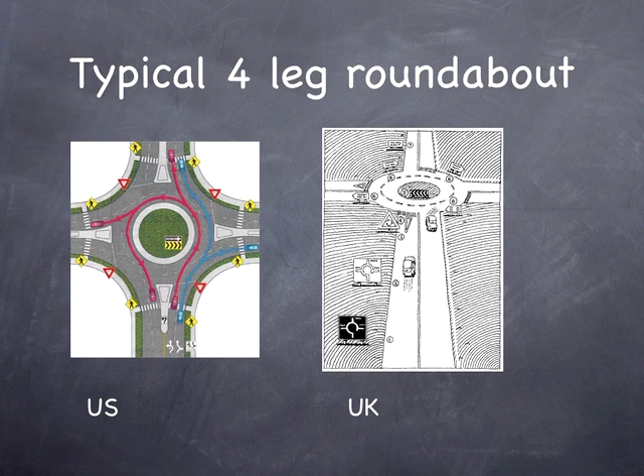to keep in mind. Geometric elements: the pedestrian crossing, and obviously it's an accessible pedestrian crossing, everything is compliant with the Americans with Disabilities Act, you have ramps, and the ramps are appropriate grades, and so on. There is a median island here called a splitter island, which gives pedestrians a refuge so that they only have to look one way when they're crossing, and then they can get to a refuge island, and then they can look the other way and cross the other side.

You could put pedestrian actuated signals. I've seen that done in places. That's got downsides, because one of the advantages of roundabouts is you don't have to put signals in, and if you start putting signals in, then you make it a little bit more complicated. Depends on what your pedestrian flows are.

A yield line: car here has to look this way to see whether they can yield to enter, but they're only looking in one direction at a time because they only have one conflict that they have to cross. And then this is a single lane roundabout. There is the central island. Okay, you might put bicycle lanes in on the side.

In this particular example, they call them bicycle treatments, and it's sort of odd because then the bicycles have to converge into traffic, so I'm not exactly sure what the advantage of that design is. And then this is the circulatory roadway. Okay, the apron is a concrete strip on the inside edge of this. Why would we put an apron there? A concrete apron on the inside of this.

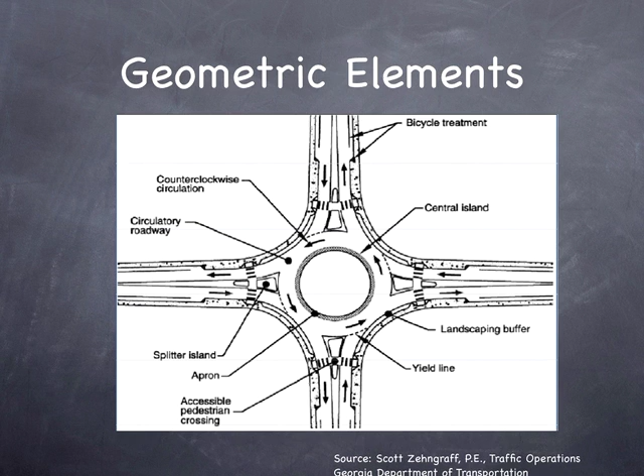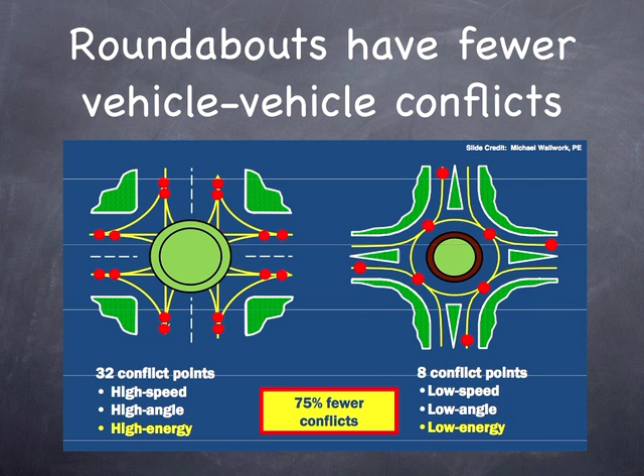The advantage, the safety advantage: drivers are paying more attention. That's one thing to keep in mind. But there's a lot fewer conflict points, in addition to the conflict points being at a low angle. And so you definitely have fewer conflicts, and they're lower speed, lower angle, and thus lower energy, and therefore less damaging. And so this is a major advantage to roundabouts over four-way stops or yields or signalized intersections.

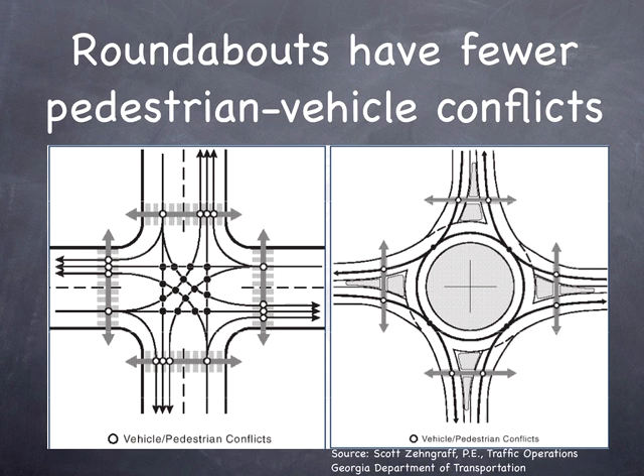There's also fewer pedestrian conflict points. Pedestrian has fewer things to think about. And so it should be safer for pedestrians, although it's a little bit less convenient. Now, we don't use them a lot in the United States. There's some historical reasons.

If you've ever been to Washington, D.C., you know there's a lot of traffic circles in Washington, D.C. Those traffic circles are not modern roundabouts. Those were designed back in the 1700s before the automobile. Reportedly, the story goes, L'Enfant, the architect planner of Washington, D.C., put in rotaries, these traffic circles, these big circles, both because of a design sensibility. This was popular in the era.

But if you have eight roads coming together at a single point and an island in the middle, you can put a cannon in the middle and point it in any of 8 directions and shoot at the oncoming mob. Okay, so this was the period of the French Revolution, and people were concerned about hordes of people and overthrowing governments and things like that.

So the intention was certainly not traffic control, and if you look at how they are today, the circles are typically far bigger than modern roundabouts would be. They're often traffic signal controlled, have a lot of other issues with them. Rotaries were implemented in a number of places.

The difference between rotaries and modern roundabouts, the primary difference, is who has to yield. So it used to be that the traffic in the circle yielded to the merging traffic. And now the traffic outside the circle yields to the traffic inside the circle. Why is that better?

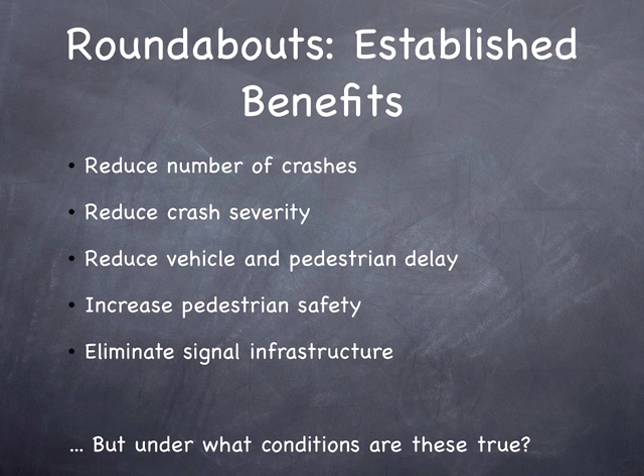And he did this in 2008 or so. They were looking at redesigning the intersection a few years ago, so he did this before the county did their study. Because the Central Corridor is coming in, and the hypothesis would be that if Washington Avenue were closed to traffic, which it has been, more traffic would use East River Road. Certainly some more traffic has. And that would cause this intersection, which was performing poorly, to perform more poorly. And so the question was, can you put a roundabout here?

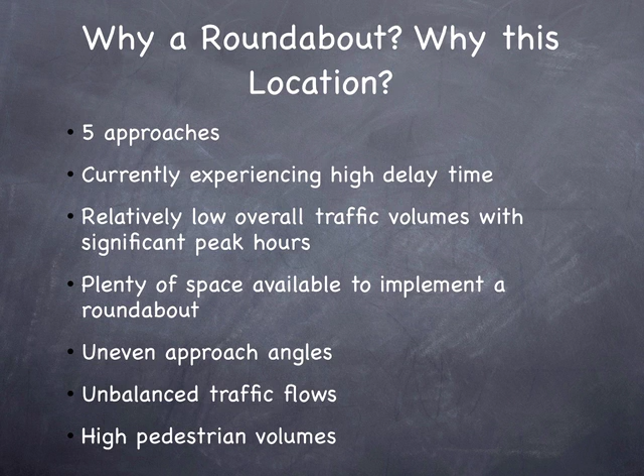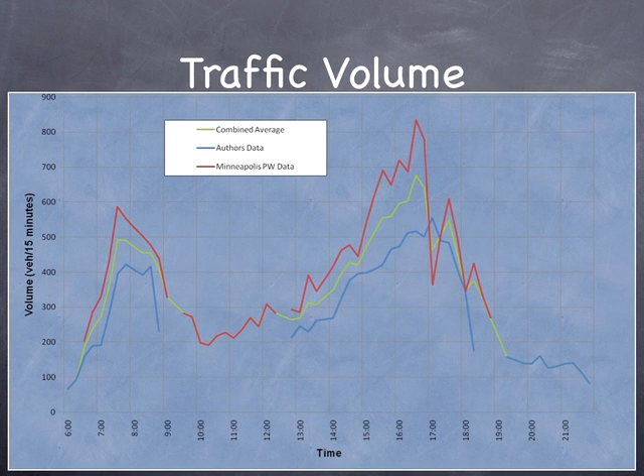Okay, so all the traffic that enters the intersection has to leave, but it doesn't all stay on Franklin. More of it that's on Franklin coming across eastbound over the bridge is going to turn onto East River Road to go to campus, for instance. So there's a heavy flow from campus to Franklin Avenue East. So it's a right turn movement in the afternoon, a left turn movement in the morning. But it's peaked higher on that movement all day long. So that's just sort of an oddity of this. Whereas River Parkway northbound peaks in the morning and River Parkway southbound peaks in the evening.

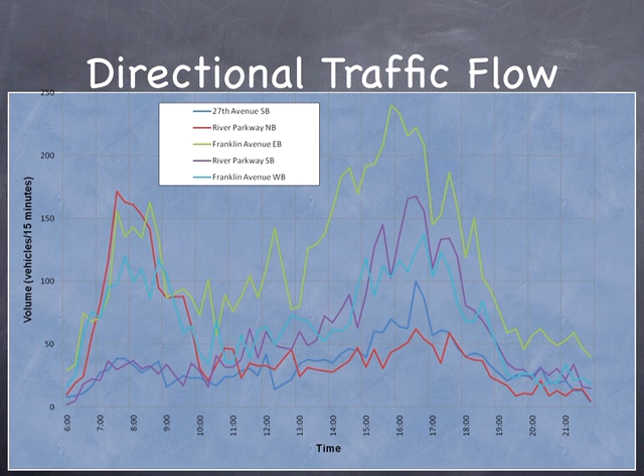3 lanes approaching on Franklin Avenue Bridge, 2 lanes going northbound on River Road, 3 lanes southbound on River Road at the intersection at the time, 2 lanes on Franklin Avenue, 3 lanes on 27th Avenue southbound. Okay. And so the intersection flares out in order to give more vehicles the opportunity to use the green time, because vehicles that are sharing lanes can't do that.

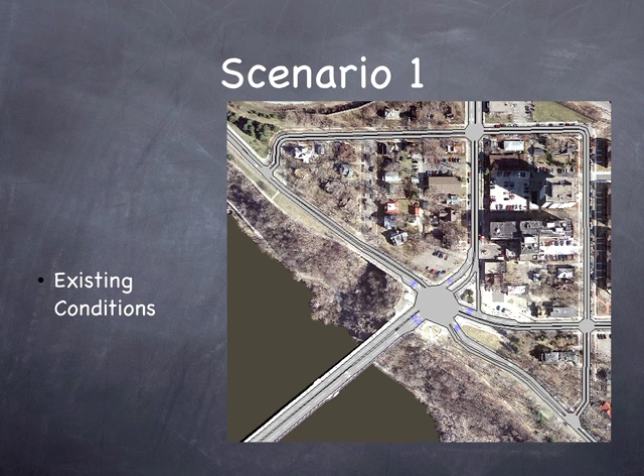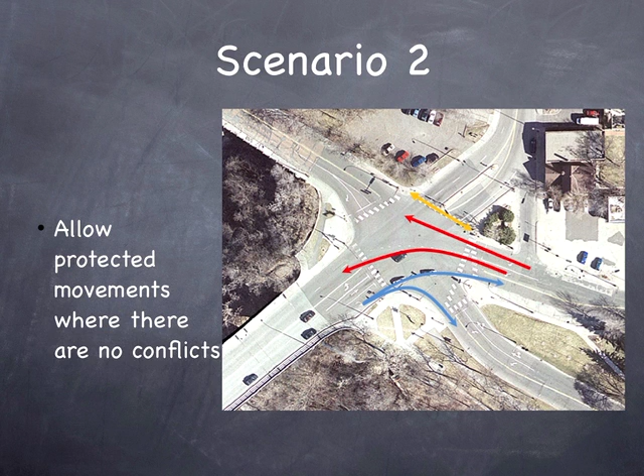First was a 1-lane roundabout, okay, with 2 scenarios within that, one where the cars yield to pedestrians and one where the pedestrians yield to cars. So what is the rule? Now, it turns out that in practice, the rule is going to be somewhere in between these, although a pedestrian should be able to step into the crosswalk and the cars have to stop.

A lot of pedestrians are too nervous to step into the crosswalk and make the cars stop. And this is a cultural thing. If you go into California, Northern California, you'll see pedestrians not paying attention to the road with the expectation that cars will stop, and the cars will stop, and pedestrians don't get hit because drivers know that's the expectation, so they have to be mindful of pedestrians. Here, drivers think that pedestrians are nervous and therefore will be aggressive. So until pedestrians get aggressive, drivers won't be more cautious, but it's a cultural thing.

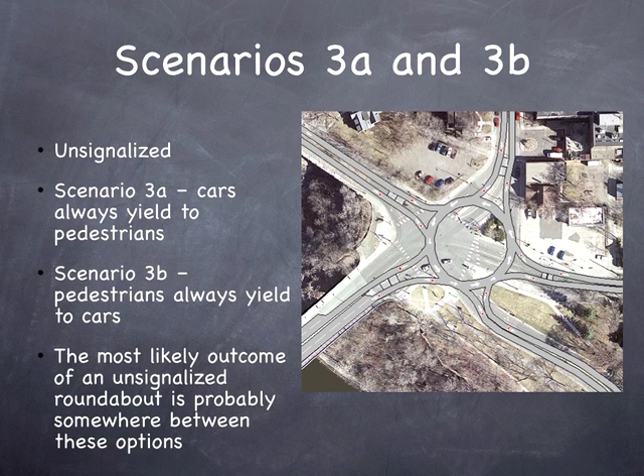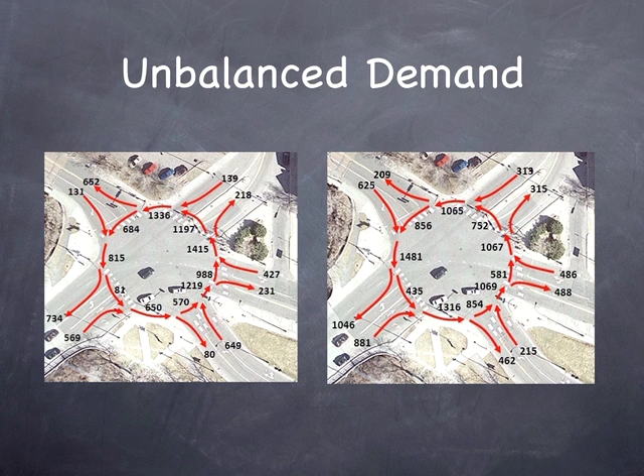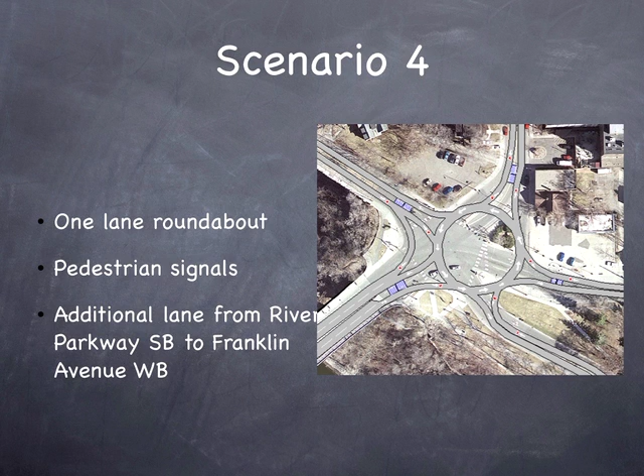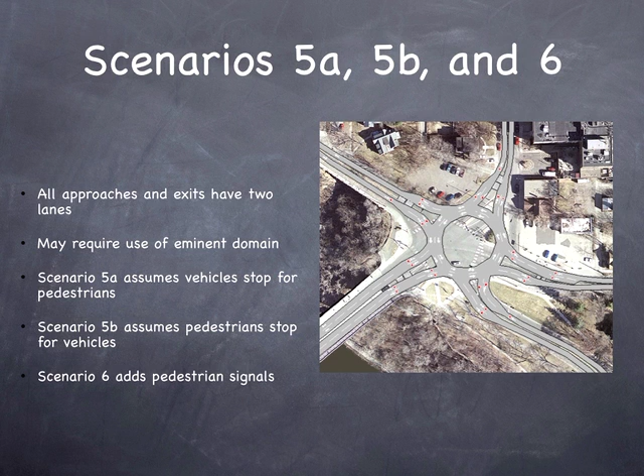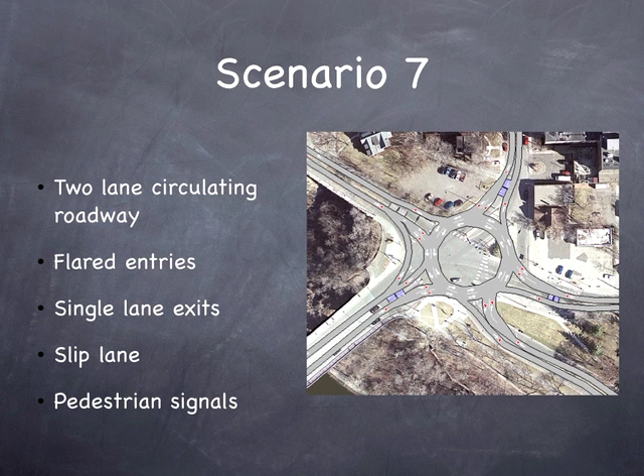So what are the implications? One, we could use roundabouts to reduce delay. You need to be careful about where you do them, of course. So sort of the general caveats about engineers. There's a question of trading off delay. You might improve it for some movements and worsen it for others, potentially, depending on how you design it. So we've talked about the advantages and disadvantages, so keep this in mind.

We don't have a roundabout there. Hennepin County in 2010 studied this intersection. They considered roundabouts. Roundabouts came out favorably on all the criteria that we just looked at. Rubin's analysis was fairly good. Yet they put in an improved traffic signal, which did reduce delay compared to the previous signal timings and intersection configuration, but not nearly as much as a roundabout would. So the engineer for Hennepin County said, oh, it's the community. The community didn't want this, the community being Prospect Park neighborhood that is up the hill.